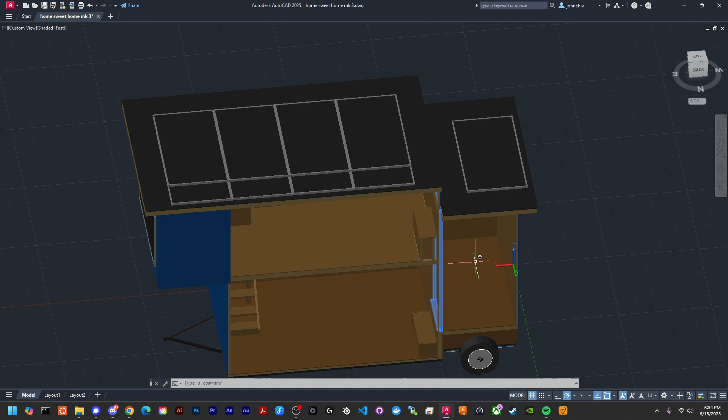There will be another interior wall here separating, because this is going to be bathroom, shower, toilet, and then in the back side here, laundry. So there'll be a little interior wall separating that. I'm not putting the wall in right now because I want to leave things open so I can see inside more easily.

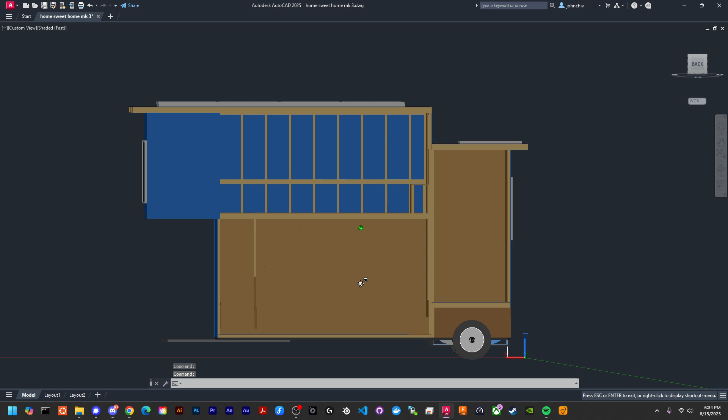But this is what we got. It looks a little bigger than it actually is, but still pretty spacious. On this bottom floor, we have 6'3" on the height. So I'm 6'2", so that'll be plenty of room for me to walk around in there.

The upper level's a little shorter. I don't remember exactly. Let's see. It is... if I can get the right spot here. Roughly 5'2".

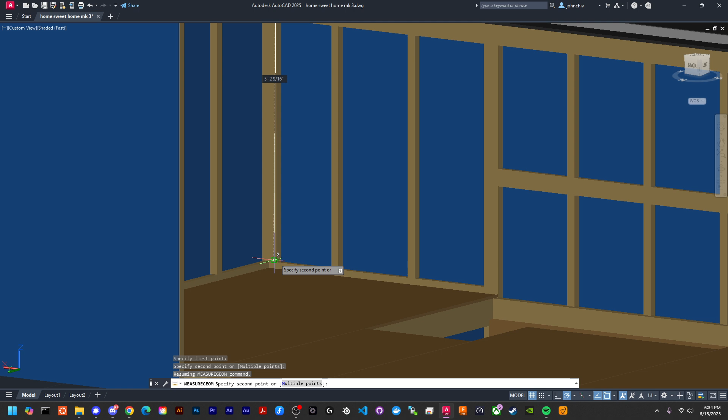So not quite standing up there, but this is going to be like bedroom and office space. So my bed is going to go lengthways right here with the headboard on this wall. And then I'll have a TV hung on this wall over there. And then this space will pretty much be open.

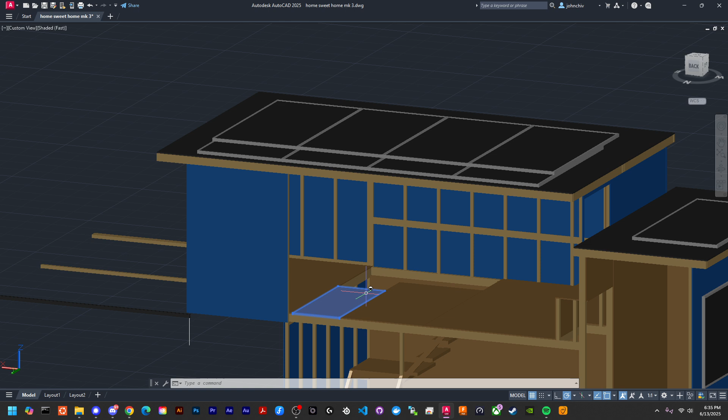Put some guard railing around this. I mean, maybe, I don't know. I'm not going to fall down it, and I doubt Pup is going to be stupid enough to fall down it. Anyways, we might put a little rail around this open spot where the stairwell comes through, but we'll see.

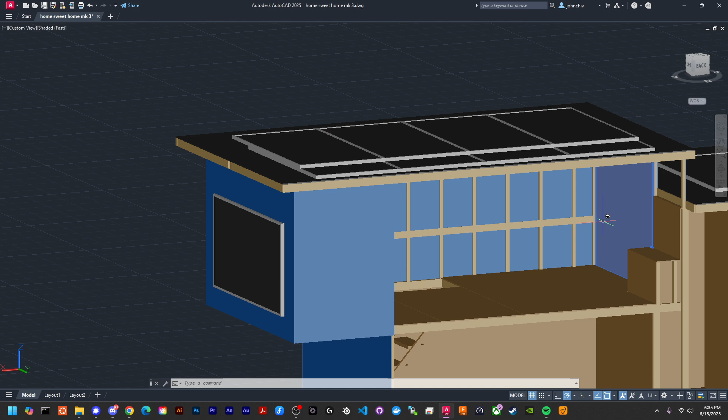And then over here in this corner is going to be my desk. So I have an L-shaped desk along these two walls here. And then my monitors will be mounted on this wall here. And my PC will rest on the desk and it'll be fixed to this wall, so you don't have to worry about anything tipping over.

And then over here, I'm going to have a little access hatch to get out onto the roof so I can service the solar panels if I need to. That way I don't have to mount a ladder on the outside or something.

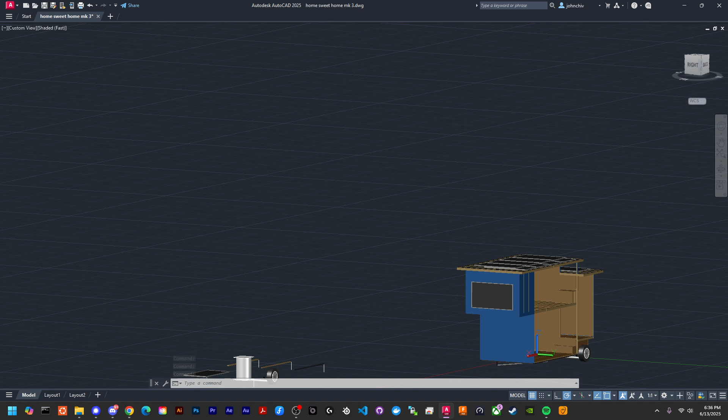But if you notice down here in the bottom, I think I said this last video, but this doorway into the bathroom was a little short, so I cut away this section here to make it so as you step up onto this step here and go into the bathroom, you have this cutaway where you're not going to bump your head on the ceiling there.

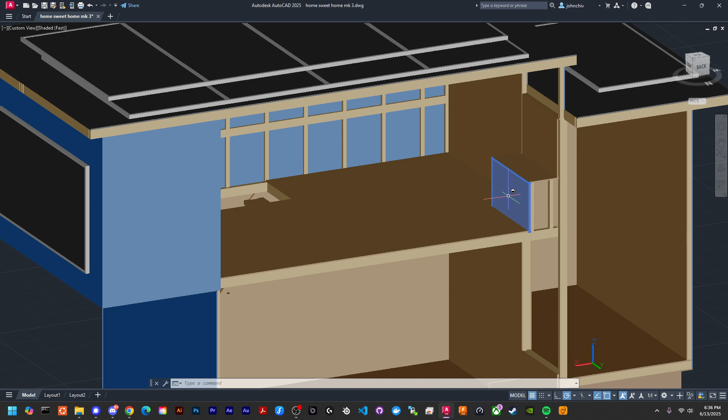So since I had that cutaway there, and since I wanted an access hatch on the roof anyways, I went ahead and did that. So now this is a cutaway, and it's also functionally a step that you can step on to get out. Of course there's going to be a door on this, it's just open right now, but so you can step up here and get through the access hatch.

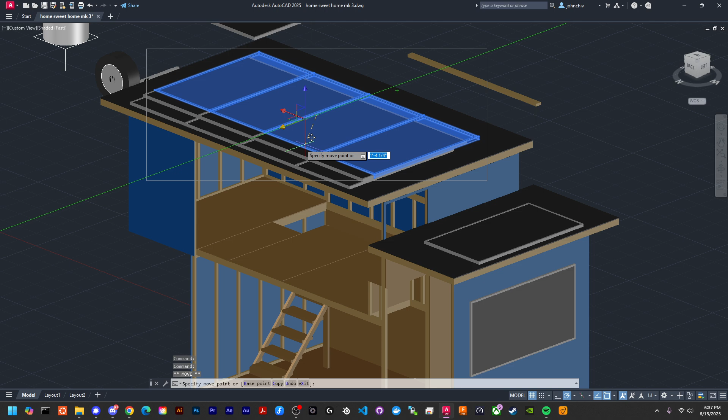And then, yeah, get out onto the roof for the solar, or whatever you need to be up there for. The solar up top, there's 2 layers of panels here. Whenever I'm parked, this top layer is going to be on a sliding rail, so it'll slide out. And then I'll have 8 panels here.

It hangs off a little bit, so it's not going to be able to be fully extended while I'm driving or whatever, so it'll have to be on a sliding rail. And then whenever I'm driving, it'll just be kind of overlapped on top of these.

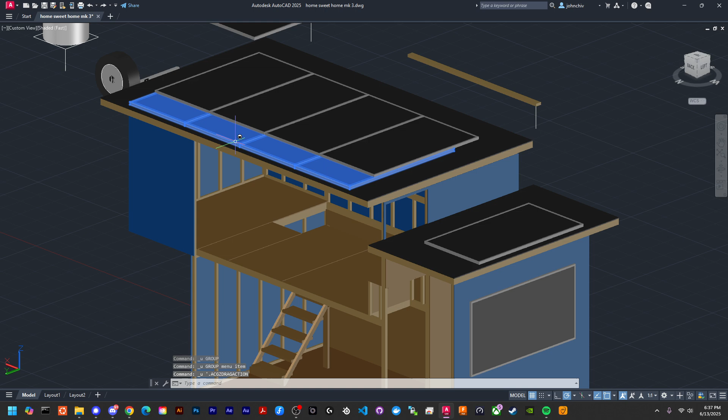And yeah, we got another panel over here. Can pretty much only fit 1 on this section of the roof. I turned it 90 degrees and tried to fit 2, but it just hangs off way too much, it's not gonna happen.

So, and then we have around the outside, we have a panel there, 2 more panels there, and 1 more panel there. These will all be on little pneumatic, like whenever you open up your lift gate on the back of your car or whatever, if you have an SUV, that gate that opens up, it has those little pneumatic or hydraulic things. What are they called?

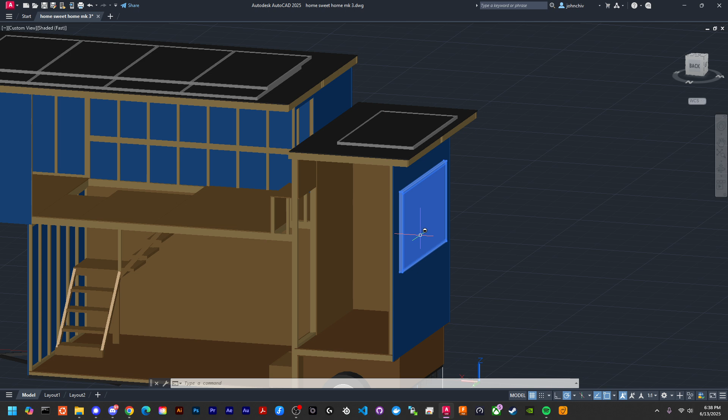Actuators. So yeah, you just kind of lift this up and the little actuators will push it up. So this will flip out from the side of the house. Again, when I'm parked, whenever I'm driving, it'll be flat against the side of the house.

But whenever I'm parked somewhere, this will flip up, and so that'll be more solar. So overall, we have 8, 9, 10, 11, 12, 13 panels. They're each 405 watt panels, so what's that?

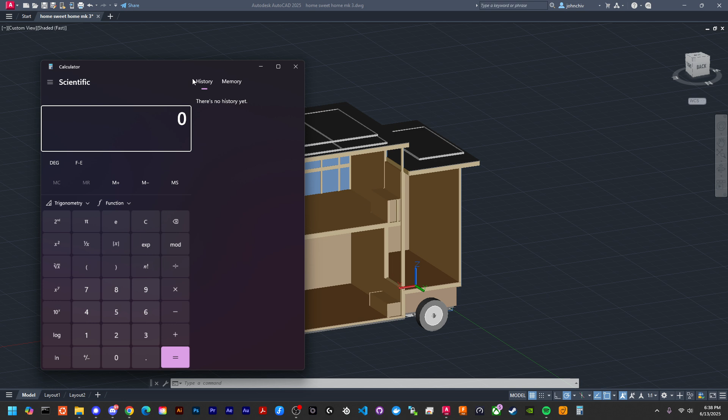What did I say, 13? 13 times 405, so that's 5,200 watts. Not too bad, that'll definitely be more than enough for me. I'm probably not going to be running too many things continuously all day, so about 5.2-ish kilowatts, 5.25 constantly throughout the day. With efficiency losses, maybe a little less, maybe 5 even, or 4,800, 4,900, something like that. But that's a lot of power.

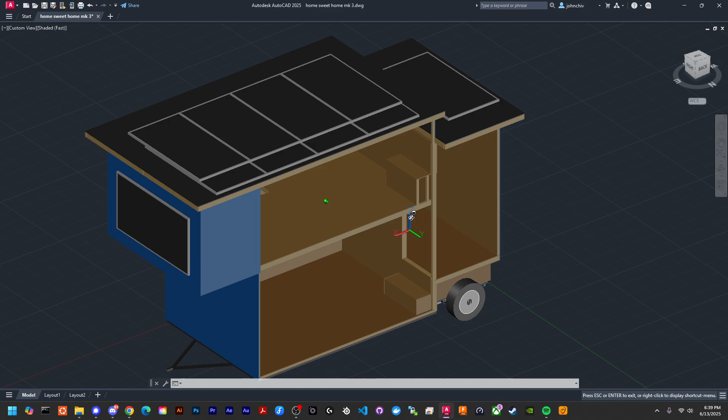And of course we're going to be storing it in batteries so at night we can use it. And then we'll have a little generator running to keep the batteries topped off if we need it. But so yeah, this is the overall structure.

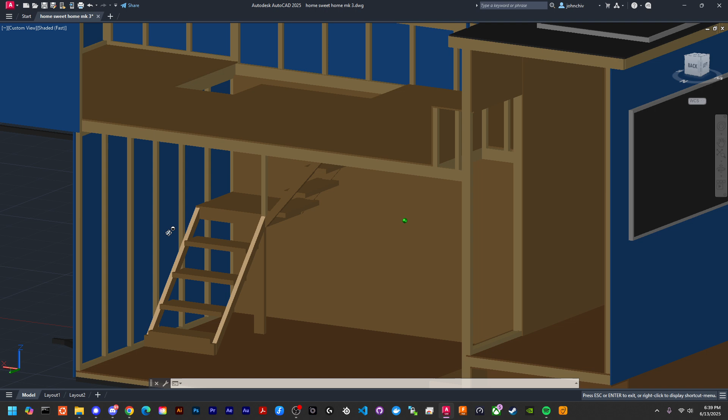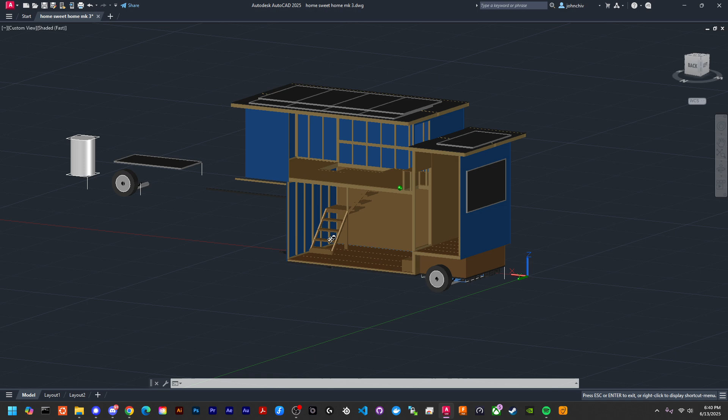I probably already showed this last video, but we got the corner stairway. I wanted to make sure this little stairwell was not too steep, because I do like having my pup sleep on the floor beside my bed, and he likes sleeping beside my bed while I sleep. So I want him to be able to get up here, and also whenever I'm at my desk he's usually sleeping on the floor on my feet underneath my desk, so I don't want him to be trapped down here. The stairwell is sloped enough to let him get up there. That's why I didn't want to just do a straight stairwell up one wall, because it would have been too steep. So we got the corner stairwell there to make it a little more sloped for him.

Down here along this back wall will be the couch, and then on this front wall will be a TV mounted on the wall there and a sound bar. And then in the corner here will be the kitchen, so the countertop will run all the way from the side of this step to that wall and then over this way.

And then the refrigerator will be like right here, right beside the couch. So the couch, fridge, and then counter space, and then either on this back wall or on this side wall there'll be a sink in the counter, but that'll leave plenty of counter space for me to cut up food or prep food or whatever I need to do. And then also have my sink there.

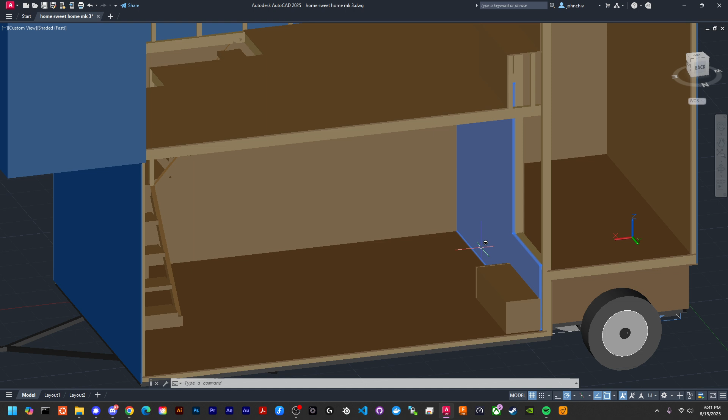Up in here is probably going to be, like I said, I'm going to step through this doorway pretty much right into the shower. The toilet will probably be back in this back corner here. I haven't decided 100%, but that's probably what I'll go with.

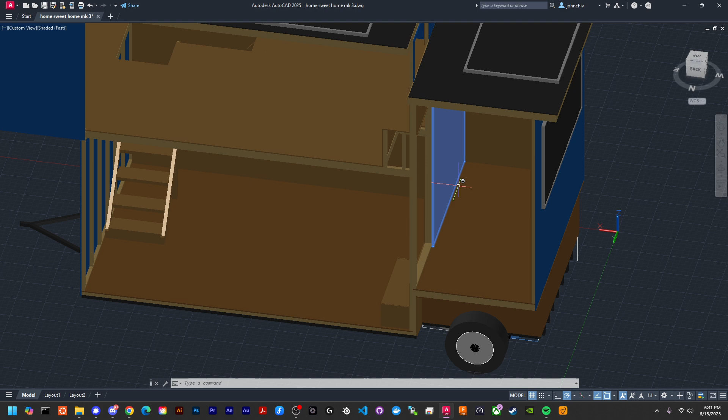And then again, there'll be an interior wall in here separating this front half from the back half. Most of this area will be shower and bathroom, and then a little room back here for the laundry, because I don't really need that much space for the washer and dryer.

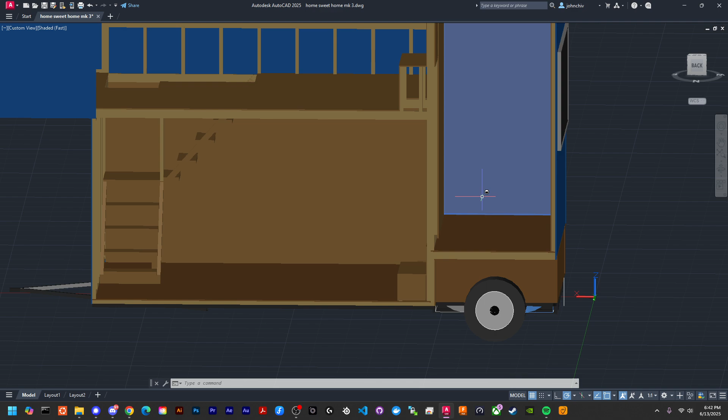Above the washer and dryer hung on the wall, that will be where I hang the inverter, the solar inverter, and also my hot water heater. That stuff will be hung right there on the wall, up out of the way, because these walls are pretty tall, I think we have like 8 feet or something right there. So yeah, plenty of room for washer and dryer, and then on the wall above it will be the solar inverter and the hot water heater.

Yeah, and that's pretty much about it.

Would you stop? Cut it out.

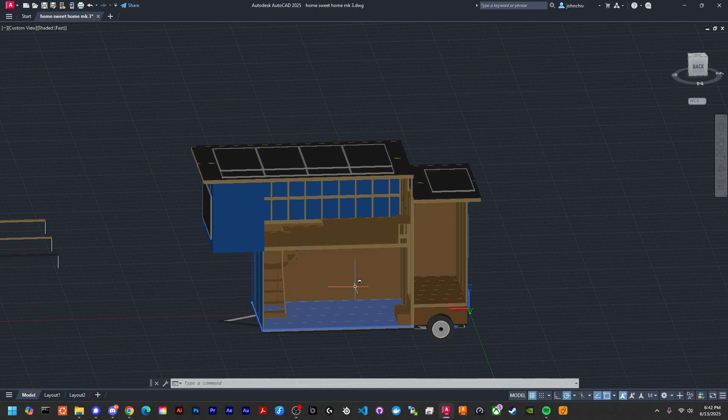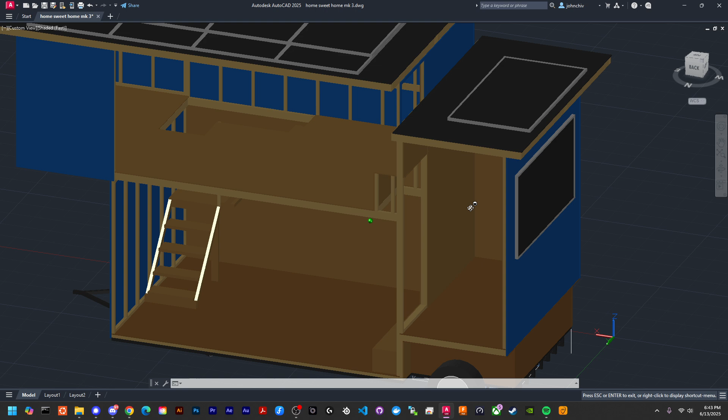And then I guess on the generator, I haven't decided 100%. I kind of like the idea of having the generator inside. Obviously there are dangers with that in terms of heat and CO, but if there's proper ventilation and everything's completely sealed off, I don't see how that would be a problem. Basically I just want it to be as quiet as possible. I'm already going to get a generator that's pretty low noise, but still I don't really want to hear it myself whenever it's running, and I don't want other people around me to hear it. Don't want it to be a nuisance to me or to anyone around me, so we'll see.

The other possibility is I was thinking about building on a little tool shed, storage shed kind of thing over here on this wall.

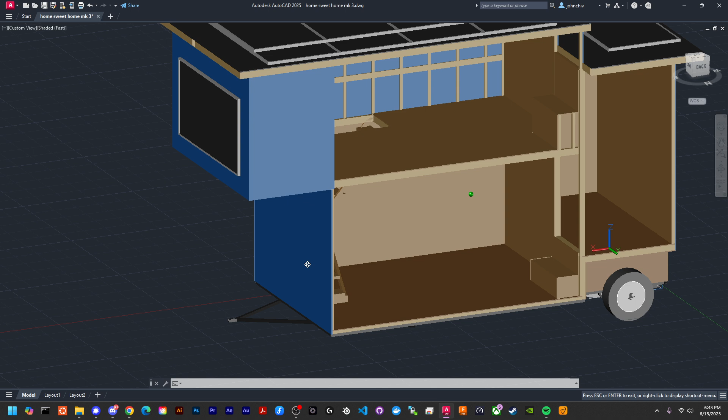Not quite the full width of the wall, but just a small section extending out here a little bit. That way you have room for the tongue to have a good turning radius when you're turning, because the back corner of your car is going to get pretty close to this corner of the wall.

It can't extend the full length of the wall, but it could go in there as well. My bed will be up here and my couch will be right here. I think if I can build a completely sealed off space back here that's really well insulated and ventilated, that'll keep things nice and quiet and cool. But we'll see, I'll get there when I get there.

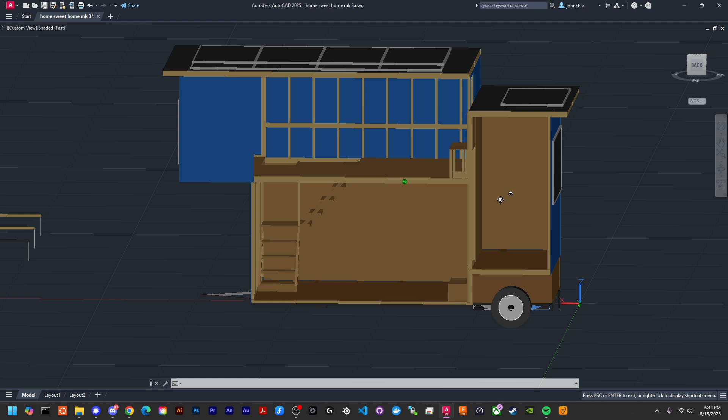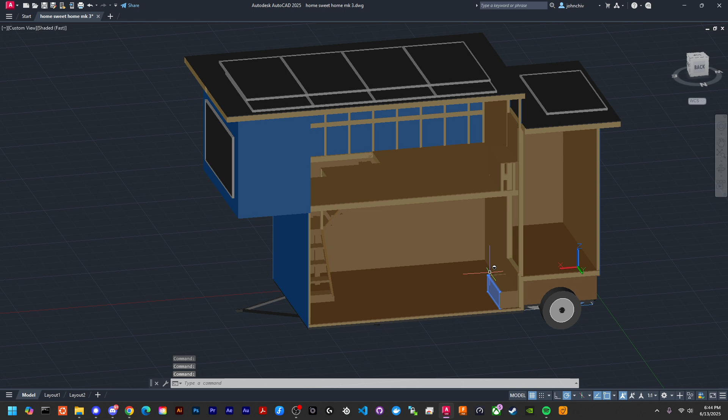The next thing I'm going to work on is placing some little furniture in here to make it look more complete. I'll finish this wall, place my desk in there, place my bed and TV, and maybe a little nightstand table thing. I'll place the couch, get the kitchen counters done and the refrigerator, and then get the washer and dryer and toilet and shower in here.

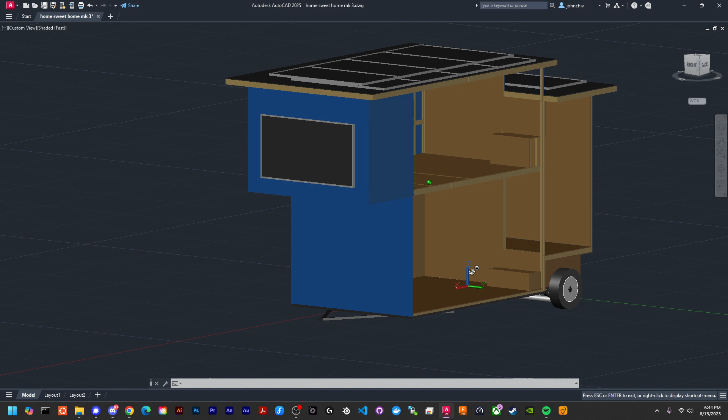Once those things are in there, I'll make a decision about where to put the generator. I also want some tool storage, I'd like to keep my tools on me, so somewhere to put those would be nice too, but we'll see when we get there. Maybe I'll put a big storage cabinet on the floor, put the washer and dryer on top of that, and all my tools could go under there. But we'll see, this is what we got so far.

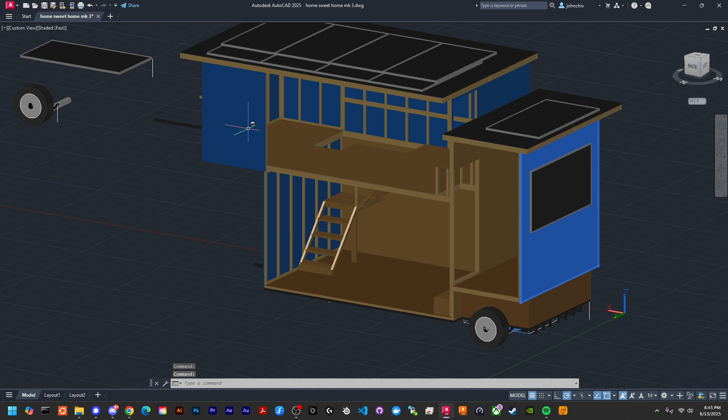It's coming along pretty well. I like the design. I'm probably going to go with something similar to this bluish exterior, maybe a little darker, we'll see. Or maybe I'll just stain it, because all of the exterior siding is going to be pallet wood. Pretty much everything is going to be pallet wood - the flooring, the siding, the interior walls, everything.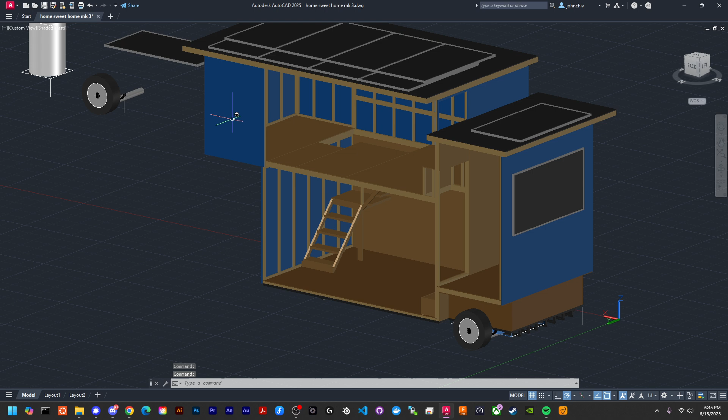So I was thinking maybe I'll do like a darker finish. Oh, the other thing I didn't mention is that this front wall is going to be where the front door is. Since I'm converting from a box trailer, the box trailer I have has a gate that drops down or folds down, whatever you want to call it.

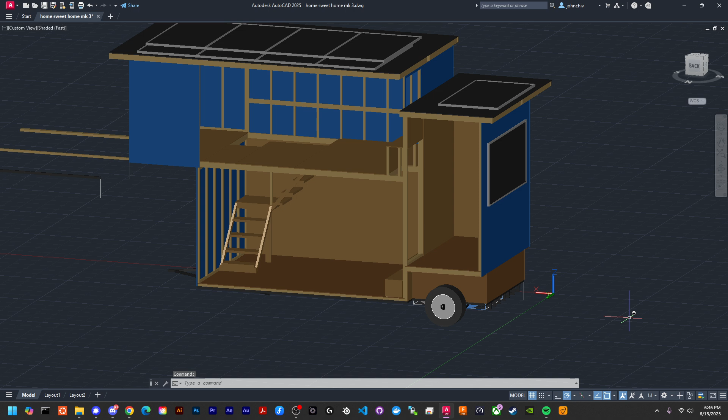Since it's made for a motorcycle, you can drop the gate down and roll a motorcycle up into the trailer. So I want to make use of that gate. What I was thinking is, you see a lot of these builds where they use the gate as a porch, and I thought that would be pretty cool.

So I think what I'll do is either put the gate right here so it can fold down and act as a porch, or maybe put the front door embedded in the gate, probably somewhere right here, because the front door will probably go pretty close to this corner.

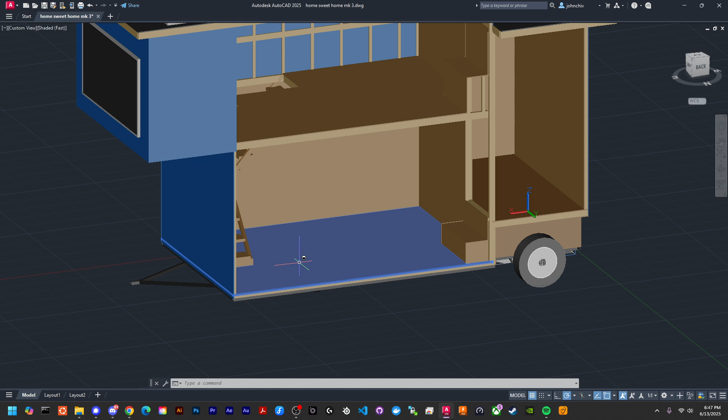If I put the door in the gate, I could either have a separate front door and a separate gate over here, or have the gate with the door mounted in it, so you can open the door and go through, or fold the gate down and have it open - either way. I might just do them separate, because I have enough space along this wall.

I was considering that on the last iteration of the build, because I didn't have that much space, since the axles were kind of in the middle of the space and it was messing everything up. But now I've moved the axle back.

Now I have this whole wall open here, and there's essentially going to be nothing except the TV mounted on this wall with a sound bar. That's it, nothing else on this wall. The couch will be back here, and the kitchen will be in this corner, so this whole wall will be open. I'll probably do a regular doorway right here, pretty close to this corner, and over here somewhere toward the middle or toward this step will be the gate, and it'll fold down, dual purpose.

I can use it as a big open space to get the couch, the bed, desk, washer and dryer in, kind of a utility purpose, instead of coming through the little doorway. It'll also have some legs on it, so when it folds down it can be level with this floor and act as a deck. That'll be pretty cool. But anyway, that's the plan.

I was thinking maybe for the exterior siding I could do a bluish color like this, or maybe I just won't paint it. I might sand and stain the pallet wood, a really dark color, and then do an accent panel around the door, since the door will be right here. So I'll have like a second layer of siding just around the door. Might be helpful to show a picture - a door accent panel.

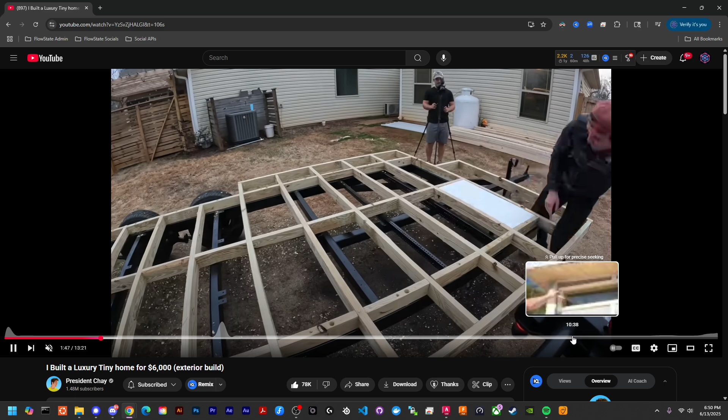Mollis, lay down. Lay down, Mollis. Oh my God, he is not listening to me.

All right, right there - so how they have it, like blue, and then they have this accent panel here around the door. I really like that.

I might go with this exact kind of color scheme, dark blue with the accent panel around the door, or instead of blue for the rest of the siding I might just stain it a really dark color and leave this accent panel a lighter color like they have it. Either way, it breaks the color scheme up a little, gives some variety - I don't know the right word - it just makes the outside look a little nicer.

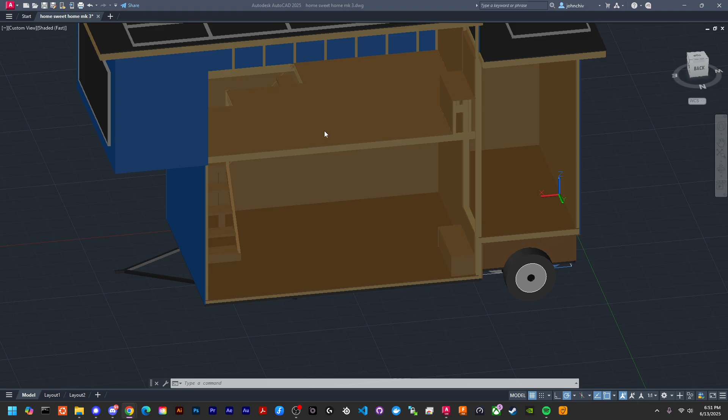And the black door, I like that too, so maybe something like that. Then in my build, off to the side over here would be the gate instead of those big windows. Yeah, that's pretty much it, I suppose.